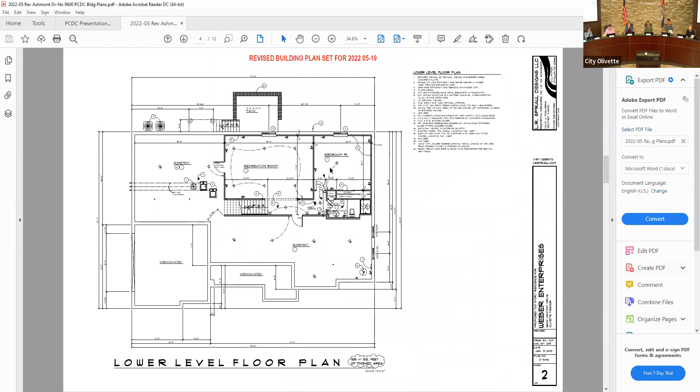While you're pulling that up, I'll just express my concern. I recall having a conversation with the petitioner about the prospect of making some rearrangements of the kitchen to break up that brick veneer. The concern I have is that we have a left side elevation with just a massive wall of brick facing the street, no windows, no articulations, no details of any kind, just a massive wall. I was hoping the petitioner would take some steps to address that concern. It doesn't appear that's happened.

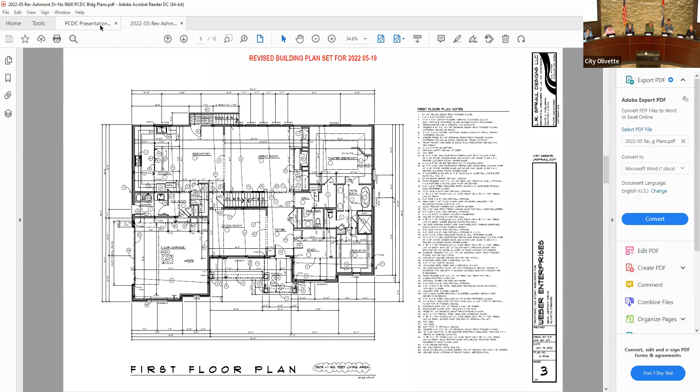Here's your garage area. I think the garage is the lower part, and the kitchen is on the top part of that left figure. That elevation that you had, I think, showed it pretty well. Right there.

I don't specifically remember that, but maybe this was discussed when I wasn't here. You do remember? Was I here? That's in my memory.

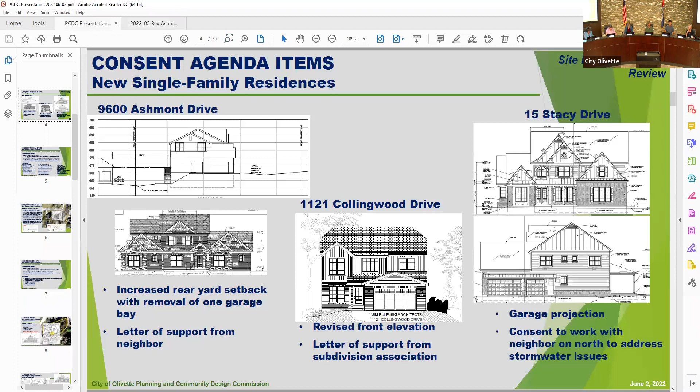Well, why don't we do this? Why don't we split this one out? We'll put this under old business, and then maybe we can approve the other two and keep moving. Does anybody have a problem with keeping these other two as a consent item? Okay, good, good. So do I hear a motion?

On the screen, there's a recommended motion. It might need to be amended to eliminate the 9600 Ashmont. Correct. I'll make the motion: I move to approve the petition for site plan, community design, and concept stormwater management plan review for a new single-family home at 1121 Collingwood Drive and at 15 Stacy Drive, as presented in the memorandum from the Department of Planning and Community Development dated June 2nd, 2022, subject to any staff conditions noted therein.

Motion, second, Mr. Chairman. The motion's been made and seconded. Carlos, will you please call the roll? Roll call vote. Commissioner Rosenberg? Approved. Commissioner Brophy? Approved. Commissioner Rich? Approved. Commissioner Wagner? Approved. Commissioner Durgell? Approved. The motion passes unanimously, 5-0.

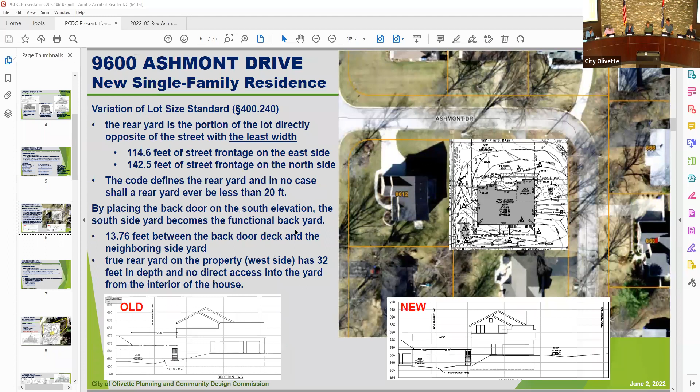Okay, so we'll move on to old business. We'll go ahead and make that the very first item. Is that okay with everybody, or do you want to make it the last? Carlos, your call. It can be brought up for discussion. Let's make it first, while we're talking about it.

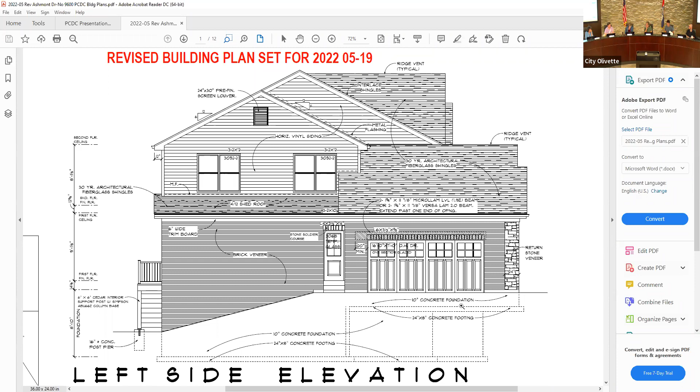I think maybe we can bring on the petitioner. Would that be good? I don't believe I have a representative here with the petitioner. Nobody online identified. So if we can defer, we'll defer that for now. Maybe we'll see if we can give it some time. All right, let's move on then.

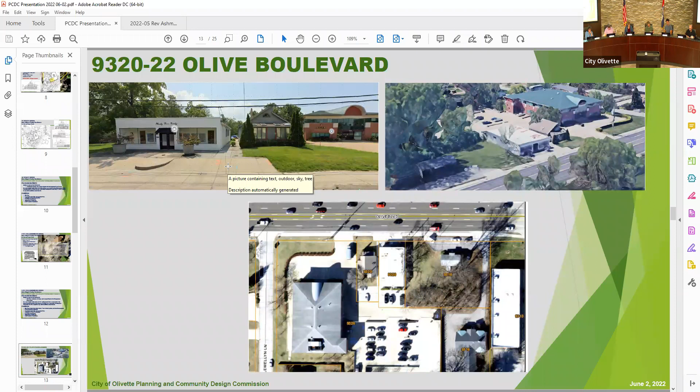Okay, we'll go to item 8 on the current agenda, which is 9320 and 9322 Olive Boulevard. Carlos? Chairman, another old business item was a proposed addition at 9320, 9322 Olive Boulevard. That is the art gallery, in the 9300 block of Olive. They've acquired the adjacent building to the west and proposed to demo the building and expand the current art gallery.

This was at the previous commission meeting. There was some concern expressed regarding the elevation articulation along Olive Boulevard. Everything else seemed to have been addressed, but there was still some concern regarding that front elevation. So they did revise and provide us some better renderings of the proposed addition.

We had those attached to your packet. We have the representatives with the petitioner here in attendance, and they'll be glad to answer any specific questions. The petitioner's representatives are here to address that front elevation. Okay, good. Does anybody on the commission have any specific comments for Carlos? If not, otherwise I think let's bring on the petitioner. Mr. Yosef?

Hello, I'm Joseph Howley, civil engineer with CEDC, here representing Lococo Fine Arts. I also have in attendance a member of the architectural staff. As you know, this item was tabled from one meeting ago, and was also put off for the weather event. But we're back, and we've gone back to the drawing board a little bit on some of the geometrics, and we're also here to explain and answer any questions you may have on this.

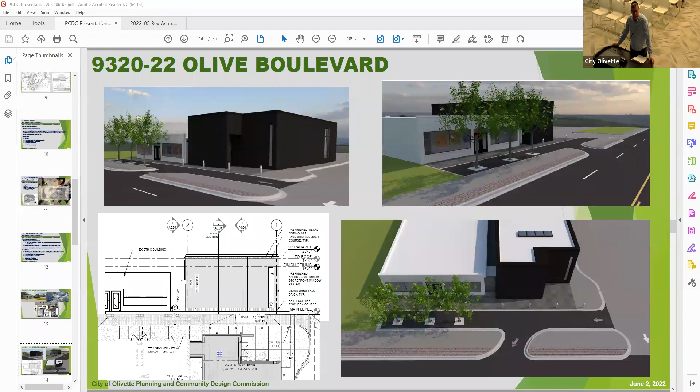I have a few little printouts here. Before, we were proposing to allow westbound traffic to come into that drive. We're no longer even considering that. It's officially a one-way out at a 45-degree angle, so the outbound traffic is pretty easy.

You can see they're both colored the same, but you can see the inbound—the inbound traffic can pull in a quarter of the way off the road. It should be pretty obvious when they slow down and think it's an entrance. It will look like a curb cut, but it should be pretty obvious when they slow down that it's not feasible to make a turn. That's a 135-degree turn then.

We've talked about this with MoDOT. They're acceptable to this; they don't seem to require any signage. They're not even sure if that would help or not. So from their standpoint, they're pretty much comfortable with what we propose here, without requiring any signs. Whether signs would add any additional safety or not, that's unknown really.

So that's probably the biggest layout issue, geometrically, just trying to solve that concern. We used to have a perpendicular driveway that looked like a regular driveway—anybody could pull in and not be able to make that turn. We did run that analysis, and it was pretty obvious you could not make that turn in. So we admitted defeat on that, and went back and tried to make it so there's no way you can turn in. That's our approach to that.

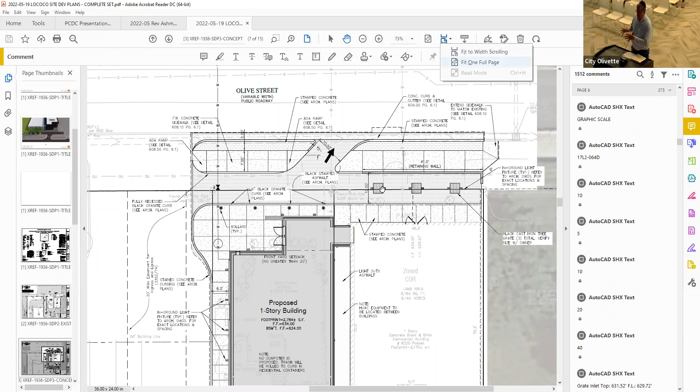I doubt at the time they built that building they either didn't know there was an easement there, or it was depicted in a different way by another surveyor. It's a matter of a couple feet, which seems like it'd be a pretty big bust. But I looked back at some of the original easement language.

It goes back to a parent tract that was 5 acres in size. It was broken up many times, put back together—it's like Frankenstein now. So it could have been that they didn't really have it depicted correctly at the time they built the building. That's total speculation; we haven't seen a plan of the building from when it was built that shows that easement on it.

They said the correction for it would be needed if it was needed—it seems to be functioning fine. It may come up if one of the owners sells; it could be something that comes up in the title, and then they'd have to deal with it at that time. Mostly it would be dealt with by a vacation of the easement and reestablishment of the easement, or vacation of that portion by the building. So there is a correction to it, but it doesn't seem to be anything critical to anything going on with our lot at this time.

Carlos, do you think it's going to impact anything? Nothing that would impact the improvements on the proposed property. Okay, just making a note, and they're pre-existing—I think it's a good point. I'm not sure, but that's the importance of going through the proper vacation process and all that.

And you'll note that within the civil plans that have been submitted, there is that boundary adjustment. I think our code does a good job making sure all the information necessary is properly depicted to avoid situations like this. Well, that easement doesn't even show up on the consolidated plat, because it's not something that could be corrected via plat, it being on the other property. It's not anything that can be relocated because it's all on somebody else's property. So I don't think that's an issue.

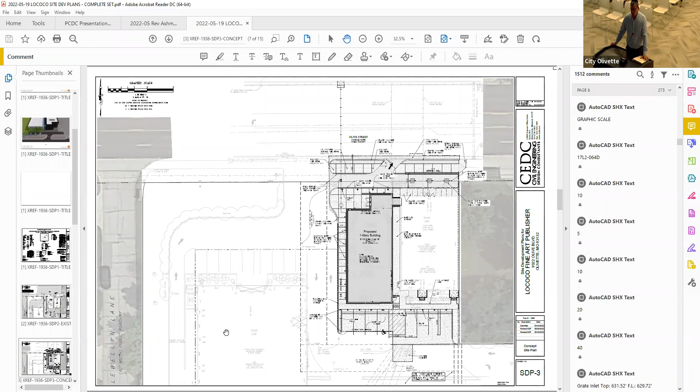Is there anything else that was a concern? I thought there was something about a front elevation. Yeah, my concern was the kind of monolithic appearance of the building, both in its height relative to the existing structure and the lack of any real detail. It's kind of a giant slab wall.

For that, I would like to defer to the architectural team who are in attendance tonight, and have them come up. Good evening, my name is Jay Shessel. I represent Robert Lococo and Lococo Fine Arts with Architextures SP. We're located at 8725 Big Bend Boulevard. Happy to answer questions or walk through the elevation.

It's meticulously designed per the owner, per Robert's direction, who's obviously the owner of the art gallery and had very specific desires of what it's to look like, and was involved in every step of the design of this. So I could address the concern that it's just like a slab wall. The wall is a very specific black brick. It is a face brick. It will be in a stack bond. It will have soldier courses running through at the base of the building and at the coping of the building.

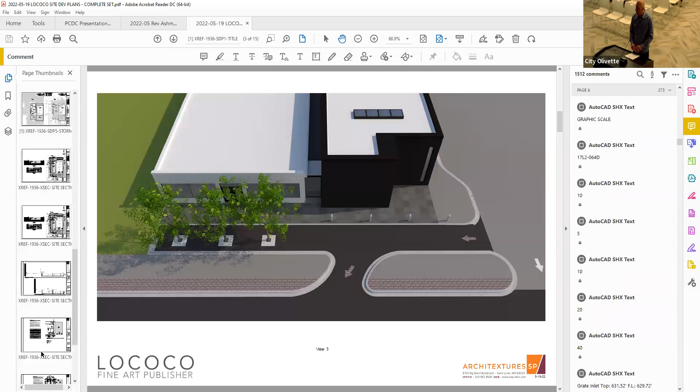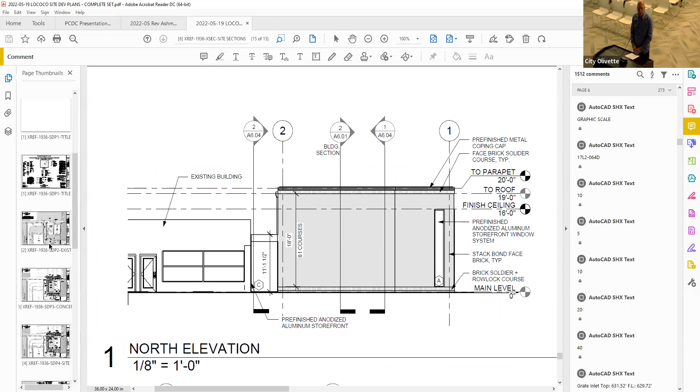You've got a link between the existing gallery to the new gallery that is glass, and then we've got step backs in the front where the entry is recessed. So there's actually more going on than a straight-on elevation shows, based on all the insets and the recesses. Like this elevation, you can't see the recess at all just because it's a straight vertical line. We do have the vertical slot window that's over on the right side.

And again, being an art gallery, the owner was very specific about having the minimal amount of windows as possible. He does not want sunlight into the museum / art gallery, because he looks at it as both. It's sort of, he's putting in the art stuff in a museum setting inside.

So no changes have been made to the elevation? That is correct. My concern stands. I appreciate the owner's interests in addressing the internal needs of the structure, but all of us have to drive by it every day, to the outside of the structure. So I was really hoping to see some attempt at addressing that issue. I realize that maybe you're confined by the proponent of this design.

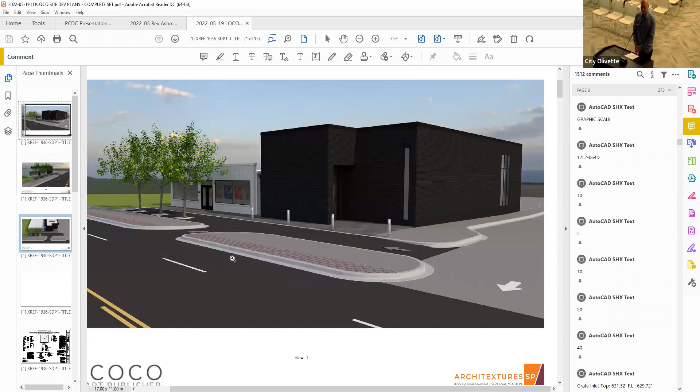So I kind of like it. I'm just the voice of opinion. I understand, to me there's a difference between a flat background of a house like the house we just saw and this. I mean, this is a modern design. It's being done very intentionally, to project a certain look as well as care for the archival contents inside. It's done very purposefully, and I kind of like the look myself. It's not that I'm overly excited about slabs, but I think in this case it's an exception.

Yeah, I just disagree. I think it's a giant monolithic block sitting there on Olive. And if this were behind the other building and it were a storage facility or something like that, that's different. But this is facing Olive. It's going to be bigger than what's around it. It's just going to be this giant 2001: A Space Odyssey block.

I don't think it looks like a 2001 Odyssey block. I personally actually concur, I think it looks fine. I think it looks good. And I do agree with Carol that there's a difference between what we last saw versus this. So that's my two cents. Daniel, I'm not sure how you feel. First of all, thank you for providing the renderings.

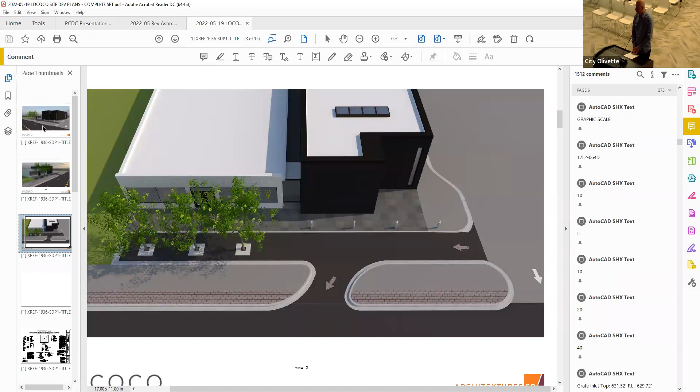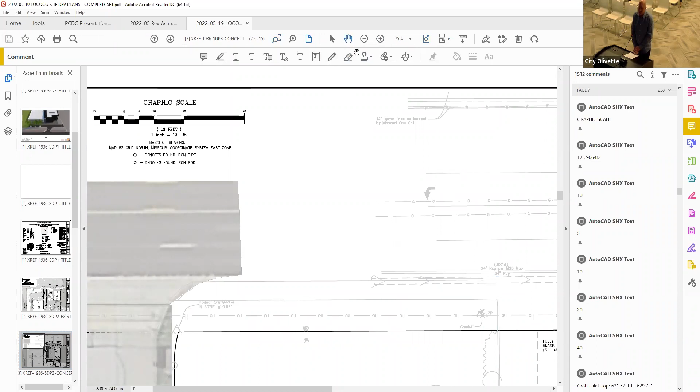I think that's really good. And I love it, I think it's great. I'm excited, so I'm the odd man out. We actually, as the design team, really like it too. We've taken inspiration from the Contemporary Art Museum and other types of facilities, and it fits the use of the owner's requirements. So we were thrilled with it also. I agree with some of you, yes, but you're going to be the deciding factor.

I like it too, I'll take my licks. I think the rendering makes it look awful dark, and with all the individual brick, it'll look very different when we render it. We've seen stuff where it looks one way and then it's totally different. I think you'll be super pleased with the Soldier Course Rowlock brick that's going on, and the detail will be very intricate, which we just can't pick up in the rendering. It looks like a big black building, but there will be a lot of detail in it when it's done, so I think it would be very pleasing.

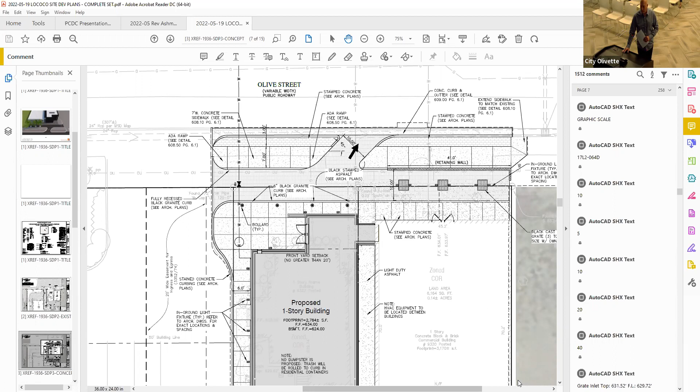Let's do this. I think we've gone over all the other issues. Carlos, are there any public comments related to this, or is there anybody in the audience that would like to speak on this? I guess we'll defer to see who's online if there's any specific comment. If anybody would like to speak regarding this agenda item online, please show your hand, located in the center portion of the lower part of the Zoom window. Chairman, I see none.

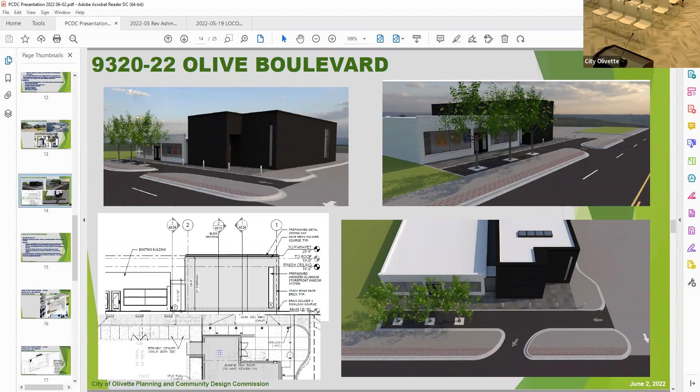While they're showing some landscape improvements, as we saw in the previous petition, this is the city's streetscape standards where we have a transitional area, a dedicated sidewalk, an uninterrupted sidewalk, and then the buffer and landscaping. Right now, the current proposal would be to landscape the existing grass areas along the right-of-way.

The other thing, again, the current code would require a convenience store operator or service station operator to conduct a traffic analysis on the site. And this, I think, is vital before any decision could be made regarding that, is how would that circulation work?

Another condition in the code would be that only one access point should be authorized or allowed on Olive Boulevard. Now, while that's easy to ask for, again, that traffic analysis will give us a better assessment of whether that worsens conditions on the site, and maybe that warrants some relief, or does it really improve the access conditions on the site?

It would provide more convenience for the pedestrian along Olive without those interruptions of the extra apron and such. So a lot of the things from the city's perspective are improvements or compliance to some of the site standards that are now required under our comprehensive plan.

And while the building owners are looking at it as an improvement to their investment in the structure itself, in the long run, the city sees this as a structure that's probably going to stay, and we want to see that same investment on the exterior. Not the building exterior specifically, but site improvements more compliant with the city's zoning regulations in Chapter 428, which are community design standards.

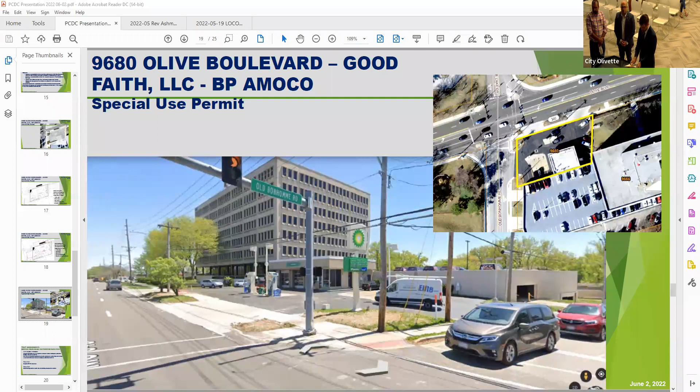This gas station has been around for so long, there is a concern. One thing you hear from the petitioner is that this business is failing right now. He bought this business thinking he'd be able to have a real convenience store, and he's concerned about its failure. He wants this location to succeed. Part of his plan was to have a sign, a gateway saying welcome to Olivette, right there on the corner, instead of having this fixture of the community closed.

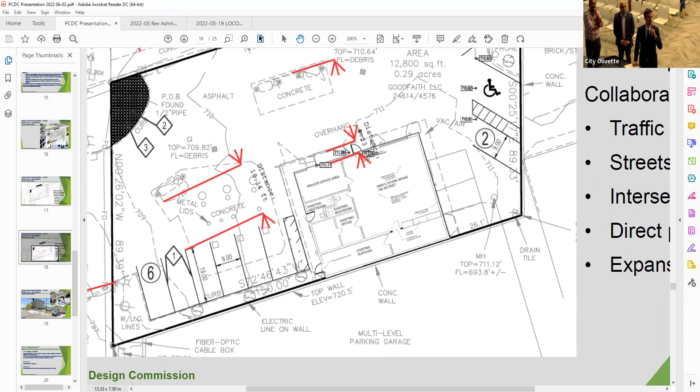I drive by this while taking care of my children, and I can't see how the traffic closure would really help. One thing that was brought up is that it might actually worsen conditions by closing this apron here. Which apron are you pointing to? Sorry, could you show them on your map? It was really helpful when you pointed that out, what it was you were talking about.

If you see this site, he's talking about closing really the main access point that I literally drive into when trying to pull in. It's at the corner, the first access point when you're on Olive to get in. I don't see how that helps the traffic in the area. I could understand wanting a traffic study, but I don't understand why it's saying right now let's also close the apron, because it might actually worsen things.

And I don't think I heard that — it was a point of information, what I saw for the staff recommendations. In the staff report, it's subject to an analysis being conducted on that. I concur in terms of what you're saying. The other thing is, again, the code would have restricted this site to one apron overall.

It's just concerning to us because we aren't sure this is going to make the traffic situation any better. It might actually take a business that's already struggling and put the nail in the coffin, for all we know. That's again the access point I come into — that's how I got to know these kinds of people. This is something adding a lot of extra costs. I understand wanting to meet the city's vision, but I'm concerned about hyper-technical compliance that doesn't necessarily benefit the community, and could create so much expense that they basically can't continue the business. That's concerning, and I think it would be concerning for the community too.

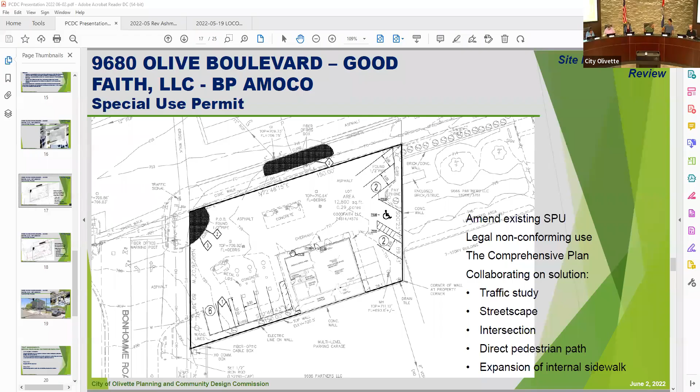At the last city council meeting, the city council requested that the commission amend the LID light industrial district so as to require an indoor medical marijuana cultivation facility as a special permit use. Right now, indoor medical marijuana cultivation is not identified within the LID district. It's been my interpretation that it is permitted as a manufacturing activity, and it is permitted by right. This amendment would require a special permit for any future use proposal of that.

In addition, the council requested that staff hire an industrial hygienist to provide guidance in addressing odor issues associated with these types of uses. So the council is looking at this in a two-part process: one is for the commission to act quickly to require a special use permit for indoor medical marijuana cultivation facilities, that's a directive from the council. The second aspect is that they've asked staff to hire an industrial hygienist to assist in preparing standards for review. So what we envision is that the commission would take action to forward a text amendment to the council tonight.

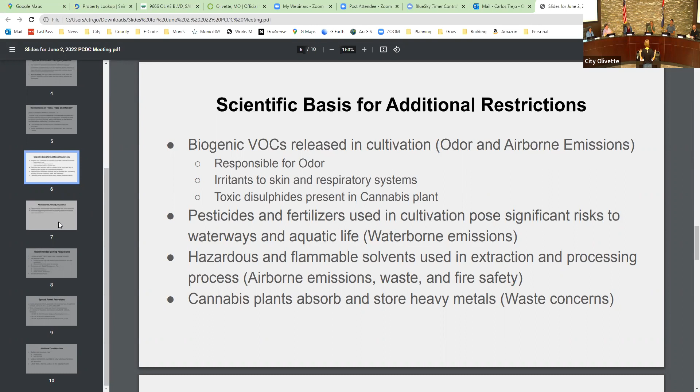Then there are the hazardous and flammable solvents used in extraction and processing. Again, these come back to concerns about airborne emissions, waste handling, and fire safety. Additionally, cannabis plants absorb and store heavy metals, which raises concerns for how the waste is taken care of and disposed of when that plant material is no longer growing or in use.

Additional community concerns that go beyond airborne emissions, waterborne emissions, and waste concerns are the psychological and addiction risks associated with close proximity to both dispensaries and production facilities. You have an article provided to our group from a local psychiatrist. There's also evidence suggesting a decrease in property values for locations near such facilities.

We're providing all of this evidence because in listening to previous PCDC meetings and city council meetings, there were questions like, how do we know it does this? Is there evidence that it does this? This is why we're presenting this evidence to you, to say it's not just anecdotal. Here are actual studies that connect these issues to property values, addiction concerns, public health concerns, and environmental concerns.

You mind if I interrupt you with a question? Sure. The psychological and addiction risks that you've identified, associated with close proximity, how close are we talking?

I don't know the exact number, because I can't say I read every single word and remember every word. It's more about access, the ease of access. If teens and adolescents, that article I sent you is specifically looking at younger age groups, so we're talking about adolescents, kids, and young adults using the drugs rather than people living near the processing facility. Just to be clear about that.

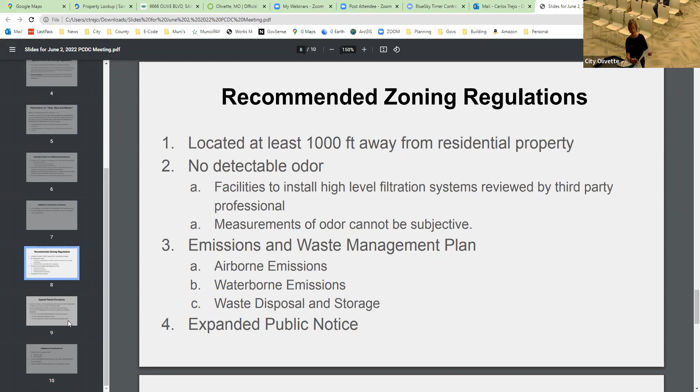One recommendation is notice within 1,000 feet of the proposed location. Some members of our group would like to see that expanded to all residents of Olivette. So that's another thing to consider.

Any special permit provisions need to ensure compliance with all applicable ordinances, regulations, and laws, including those from the Department of Health and Senior Services, the EPA, the Department of Natural Resources, and the Metropolitan Sewer District.

Finally, additional considerations not necessarily spelled out as clearly in our proposal include a safety and security plan addressing public safety concerns as well as fire hazards from the solvents used in processing.

And a process for clearly handling citizen complaints by the city, not by the business, with a clear timeline for resolution. Finally, clear terms in any special permit for how and why that permit could be revoked.

So we thank you for taking the time to read through all of this information. We really hope to be a partner with you in the development of any potential zoning regulations and text amendments to the light industrial district.